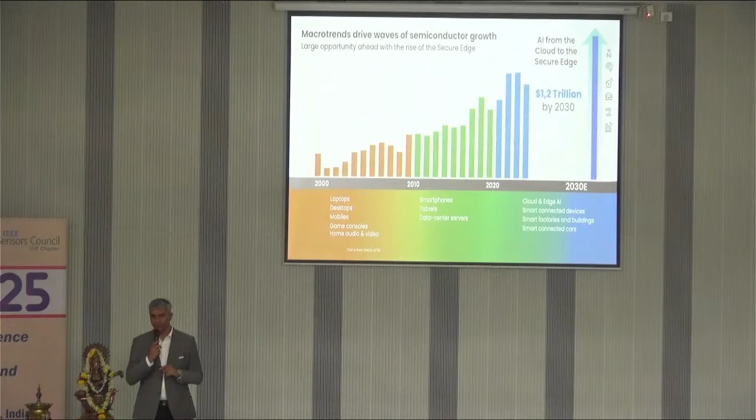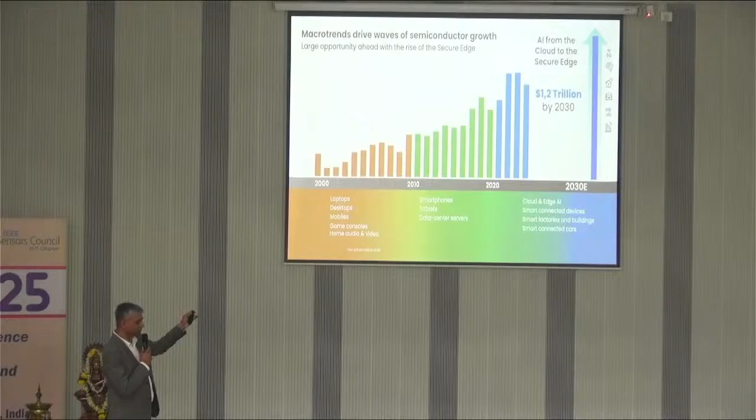I'm not going to bore you with many of the NXP slides, but I just wanted to give you an overview of the organization I work for. So this is one of the main slides for today, the macro trends driving semiconductor growth, how the semiconductor industry is shifting. In 2000s, I've put them in three brackets: 2000, then 2010, then 2020, and what we can expect in 2030, which I'll cover in the next slide.

In 2000, the major focus was on laptops, desktops, mobiles, gaming, etc. getting introduced, and they kind of pointed the whole decade. Fast forward 2010, the phones became smartphones, the television became a smart television, refrigerator became a smart refrigerator, the oven became a smart oven. So all the smartness got into devices, and then certainly a huge push on tablets and data centers.

Fast forward 2020, we call it as the era of cloud and edge. Edge with AI. Smart connected devices, smart connected buildings, homes, cars, and whatnot. I'm going to talk more about cars in the upcoming slides, but edge with AI is something where most of the world's solutions are moving.

Because first, we want to process at the edge. We don't have enough patience to fetch the data, send it to backend compute, do the compute, generate some next action and send it back to the device. We want to process everything at the edge because we want zero latency. And second thing is with the AI - once you extract some data, we want AI to be in place to find out what makes sense to us, and quickly take action based on that and move forward.

Quick example of edge AI is autonomous vehicles, where there's no driver sitting inside the car, and there is a situation on the road. The car has to identify the situation, find out what would be the next action, and implement that action before the blink of your eye. We'll be talking more about those in the upcoming slides.

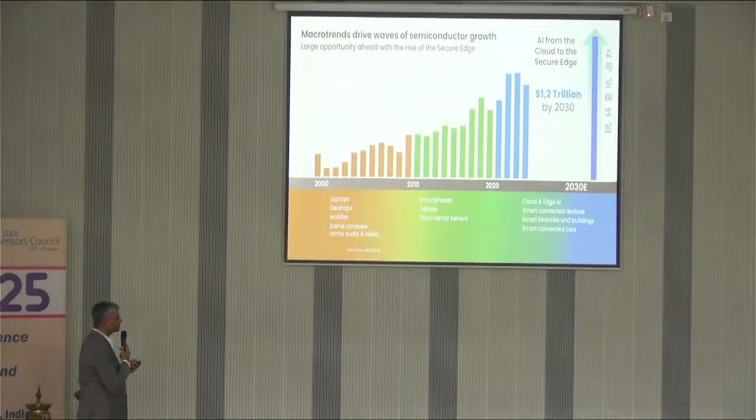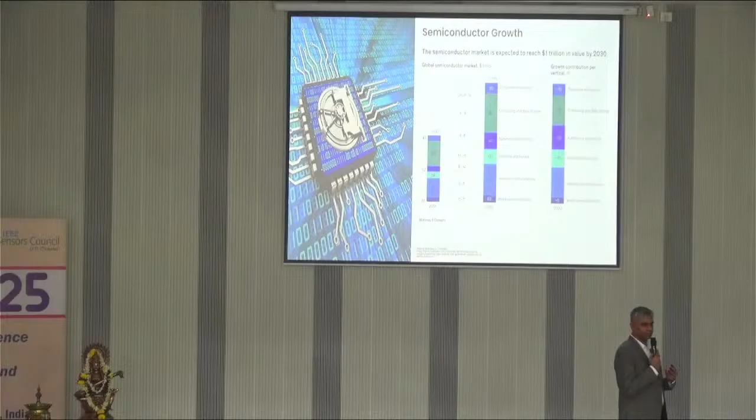The next slide has more details, but by 2030 we will have more than $1 trillion plus economy when it comes to semiconductors. One of the reports published a couple of years ago, which holds true, says that by 2030 we are going to hit a 1 trillion, 100 billion plus market. These growths in these 10 years are expected across different segments. If you see, the large part of it is coming from computing and data storage and communication, wireless communication. A huge chunk of this is coming from automotive electronics.

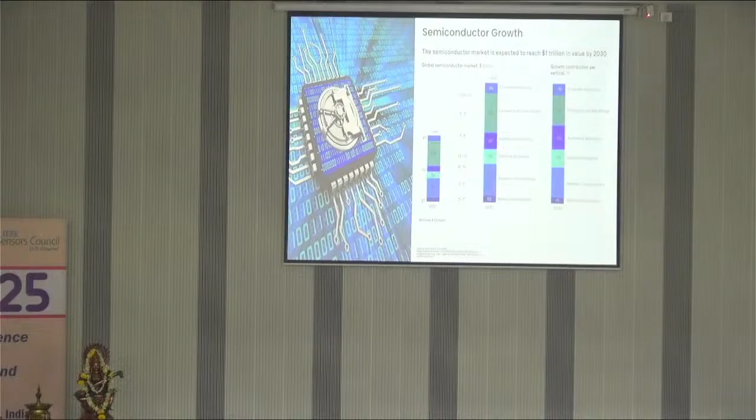That's where we have a strong hold at NXP. Certainly then there are industrial, wired communication, consumer electronics, etc. But that's where most of the focus is, and that's where most of the companies in this particular segment are investing.

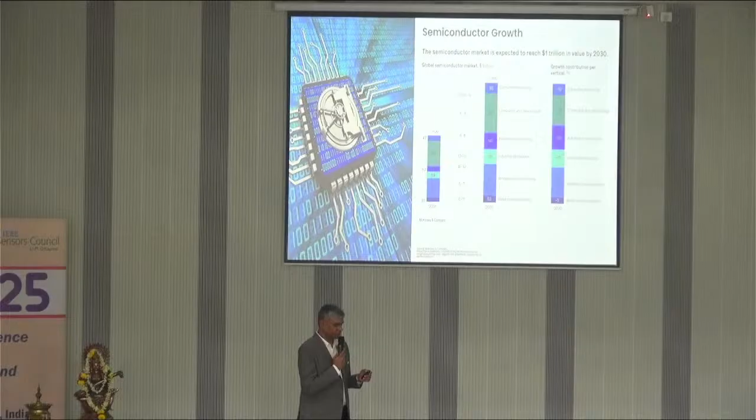The smart gadgets, especially on the healthcare side of it, are getting a lot of traction. Certainly we want them to be smarter, we want them to be as minute as possible, and we want them to live for a longer life without any recharge. Ideally, I would like to see a phone in my lifetime which I buy off the shelf and don't need to recharge for the rest of my life. That is possible - one is certainly how do we get that energy, second is how do we consume the least of the energy.

COVID has taught us how to be effective, how to do our business, how to study or do whatsoever, still being 6 feet apart. And these smart gadgets are enabling us to achieve that.

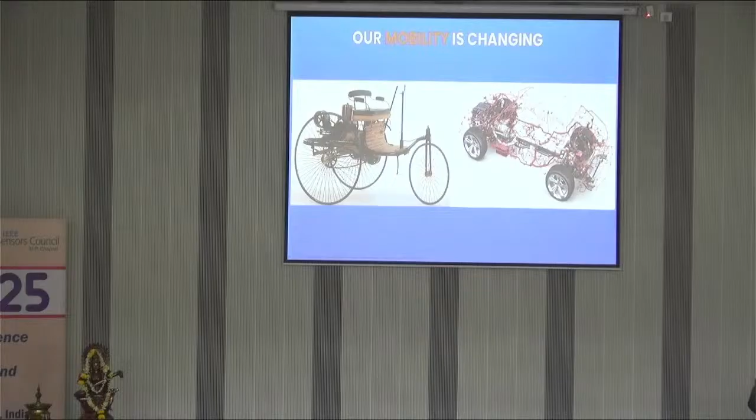I want to give this opportunity to the left audience first. Anyone in this row? 10 kilometers? You guys, come on. You're not going to get a chocolate from me for a right answer, or any penalty for a wrong one. But it goes into kilometers, not exactly a few hundred kilometers like we use in space rockets, but it is in kilometers. Any guesses the length of this whole wire harness inside a car?

I'm not going to come to you guys, you speak a lot. Any guesses here? No Google allowed. Is it in some grams or kgs? Extreme right, in kgs, how many kgs? 5, 10, 15? 10 kgs. Excellent. So it can go as high as maybe 100 kg.

So what if I make this car a smarter car? Instead of having 100 different functionalities, if I give them a big powerhouse to do all that compute, I can reduce this wire harness weight, and the less the communication time, the better the efficiency is.

Okay, let me move forward. So, shift in mobility. Okay, paper leak ho gaya kya? Okay, I wanted to ask another question here. How many semiconductors are typically there inside the car?

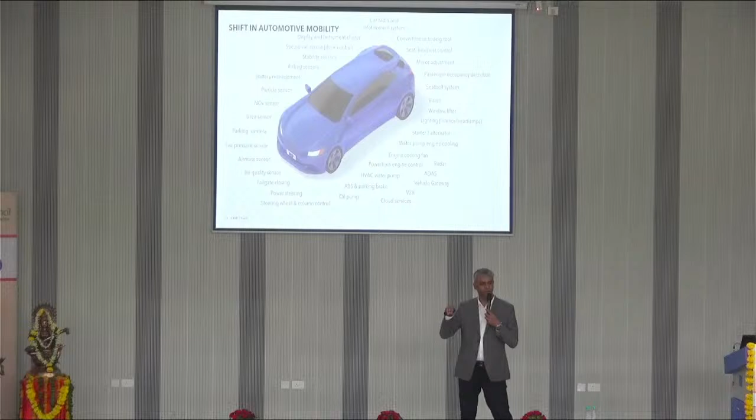Typically we prefer our location services to be on in our smart gadgets. I'm not fond of smart watches, I prefer an analog one. So if there's a smart watch which you are wearing, or a smartphone with location services on, and if there's a smart hacker who can get into your phone, they would know, okay, I'm inside Bhopal now. Even if I take the very first flight, it's going to take a couple of hours for me to get back to my home. So they have a safe haven to get into my home and have their fun.

So with every technology, certainly there's a flip side of it as well. Let me move forward on this particular topic. Automotive, accelerating the road to vision zero, and there are many kinds of vision zero we are targeting.

Let's first talk about autonomy. Autonomy is the driverless car we talk about. There's a study which says that 94% of accidents are from human error. So if we remove this human from the car, we can save 94% of lives. That's millions of humans, if I don't have human error while we are driving.

How is it possible? It's possible using ADAS. Anyone in the room who knows about ADAS? Excellent. So it's Advanced Driver Assistance System.

That means the driving would be done by autonomy instead of human. And there are different levels of autonomous vehicle. I can spend half a day talking about those levels, but I'll try to quickly summarize them in the next 2 minutes. Level 0 is our typical car, a human drives with a typical gearing system, etc.

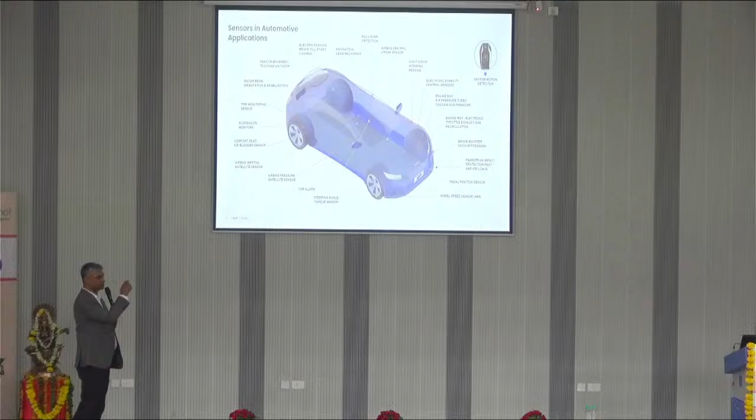Again, a good view of sensors in the automotive application. I'll probably skip this in the interest of time, but as you see, there's a hell of a lot of sensors sitting inside the car. The major technology vectors for any smart device are sense, think, connect, and act.

First, you need to sense what's going on. Then you need to process that information. Then you need to connect back and act based on the information.

A typical example you might have seen 2 months back when we had a conflict with our neighboring country. We sensed, we connected, we acted, and destroyed the object before it hit us. The same thing goes for any smart gadget.

And we have multiple solutions around it, from cloud infrastructure to enabling technologies to edge solutions. These are the different solutions NXP offers.

I'll fast forward to this, an important slide to talk about. I can spend hours and days talking about car infrastructure or architecture, but quickly, the vehicle transformation is underway from a hardware-oriented vehicle, where different functions sit in different parts of this chassis.

Functions are tied to ECUs. It has a static architecture and exponential increase in complexity. The more new systems come in, new features come in, the complexity goes high. So the future car would be software-defined vehicle, SDVs. That's where huge investment is ongoing.

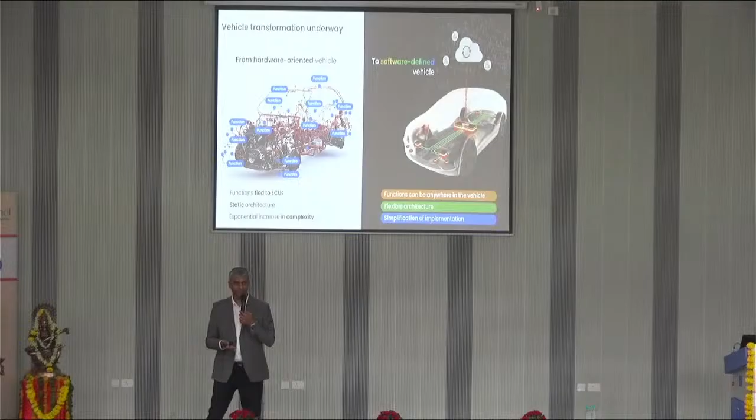So functions can be anywhere in the vehicle, flexible architecture, simplification of implementation. We want the powerhouse to be sitting inside the car, and this processing should be so strong that even if a functionality I'm not aware of today gets processed or created in the next 5 years, my processing should be strong enough to get that patch loaded inside the vehicle and start enabling those features.

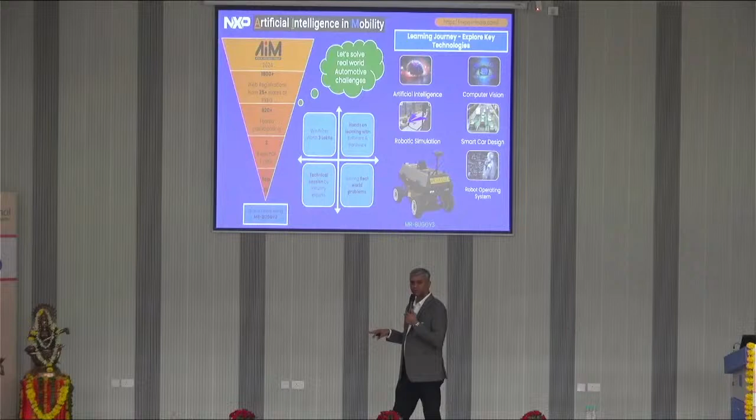Another good thing I want to talk about is Artificial Intelligence in Mobility, AIM. This is again an annual event of ours, and we closed the registration on 23rd of June for the 2025 session. I really feel proud that we got close to 5,600 registrations. The good part of the story this year is that we got registrations from every single state of India. Typically in the past we haven't done a good job reaching the northeastern states of India, but this year we are glad we have participation from different states.

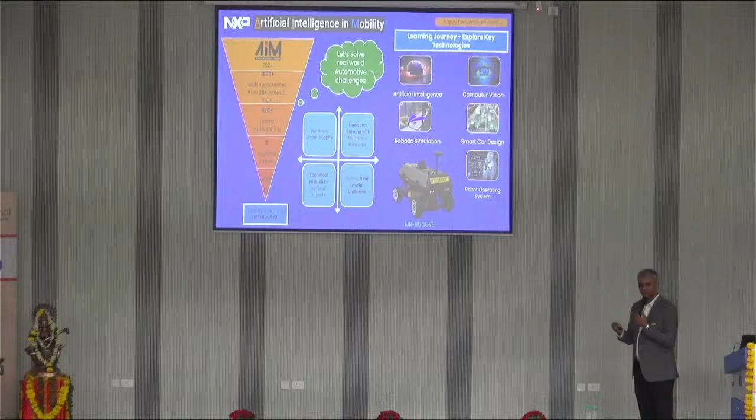So this is an annual challenge we do. The stats you see on the slide are from last year, and since we closed this registration and sent out mails just yesterday, these numbers are yet to be updated. We did 3 regional finales last year, one each in Hyderabad, Bengaluru and Noida. We are going to do the same this year.

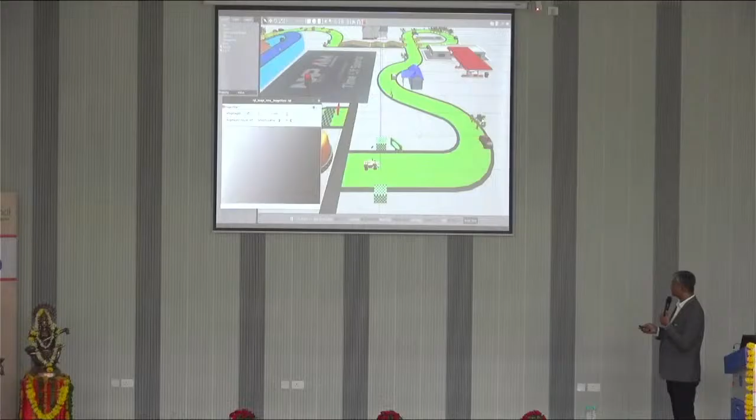In the regional finale, what happens is, let me show the next slide - this is what we do. The students design on an artificial track, and we select them for the grand finale from these three different regional finales. To these regional finale winners, we give them an MR-Buggy kit.

How do I get to the previous slide? So we give them this kit, which is worth $5,500, and then we train them again. Before this regional finale event, we are going to start the training from 30th of June. We train them, and they then play around with this hardware. We do a grand finale at our NXP Noida office, where these physical buggies compete, and there are 3 lakh plus worth of prizes to be won.

The other initiative is the Women in Tech program, which at NXP we run as an annual event, and on 4th of July all these women will be visiting our campus for the 4th batch. There is a selection process - you need to apply, then there is a written test, some interviews, and if you make it, you get trained for the next 1 year by our training partners, and you get a 50K scholarship, conditions apply, some taxation etc. But you need not pay for those trainings, that's all taken care of by us. That's again a good initiative. Please pass it on to your women friends in the second year of engineering.

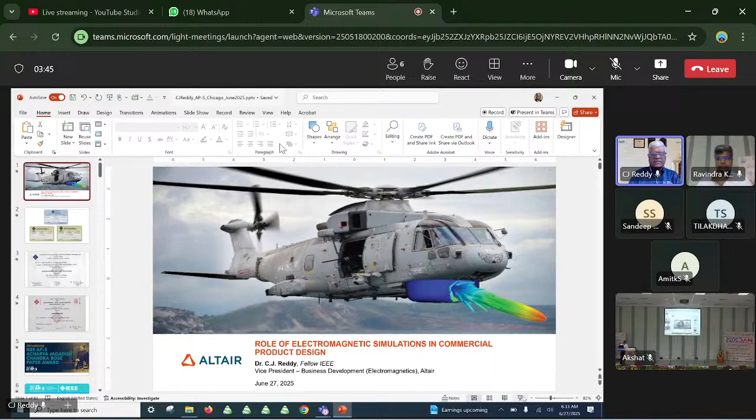I've been speaking, I guess, for a few years at this conference, and thank you very much again for inviting me. So today's talk, I'm going to focus on the role of electromagnetic simulations in commercial product design. As already mentioned, I am the VP of Business Development for Electromagnetics at Altair. Before we start my talk, you probably know that I'm currently the President-elect of IEEE APS, Antennas and Propagation Society, which played a critical role in guiding my career and also helped me professionally and personally with networking and other aspects.

So for students in the audience, I advise that some of you, if you are interested, first become IEEE members and then become Antennas and Propagation Society members. I want to share from my own history. I was a student member back when I was in college at NIT Warangal, and then afterwards at IIT Kharagpur, I continued my student membership. The reason I was attracted to IEEE back then was because it provided, I would say, courses that are beyond what is taught in the class. That helped me a lot.

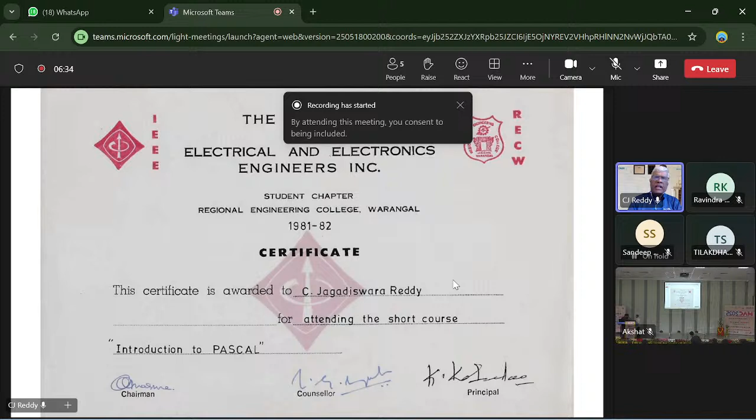Having come from India, I always thought Acharya Jagdish Chandra Bose contributed to millimeter wave communications back in the 1800s, and recognition came a bit slowly. So this year I contributed to this award to say APS should introduce this, and now there is an award by APS, Antennas and Propagation Society, in the name of Acharya Jagdish Chandra Bose for the best paper in Antennas and Wireless Propagation Letters, for a young professional who graduated within 15 years. This will be awarded for the first time next year, but there's still time. Some of you may want to write papers to AWPL — you may have a chance to win the award in the name of Jagdish Chandra Bose.

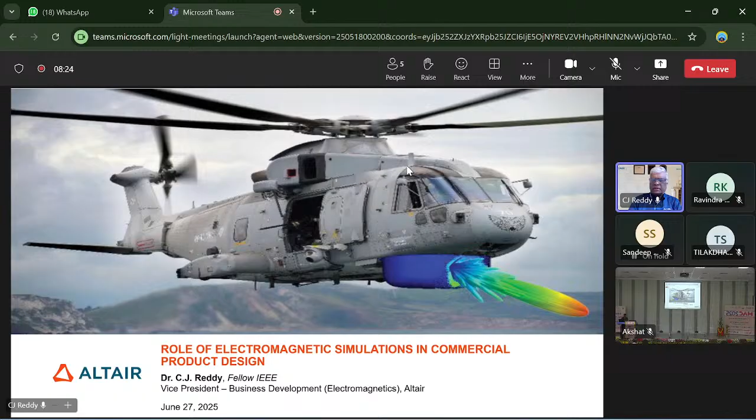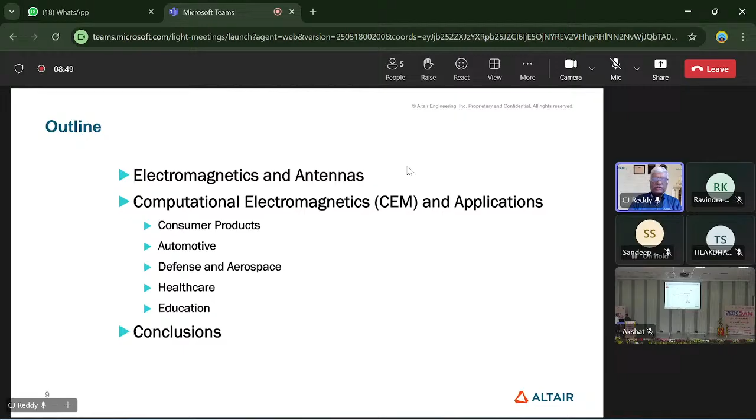That's the role of electromagnetic simulations in commercial product design. I mentioned I work for Altair, but let me give the outline here. We'll go over electromagnetics and antennas as an introduction, then talk about computational electromagnetics and how it helps in various industries — consumer products, automotive, defense, aerospace, healthcare, and education — and conclude my talk.

As I mentioned, I work for Altair, but Altair has been acquired by Siemens — probably you've all heard of Siemens. So now we are part of Siemens, and we haven't yet become part of this division, but eventually we'll become part of the Siemens Digital Industries Software division. That's the transition happening in my career currently.

Coming to electromagnetics and antennas — most of you, if you're studying electromagnetics, are not new to Maxwell's equations. Any antenna simulations we do, whether with commercial tools or otherwise, should start with Maxwell's equations, the four of them stated here. These are called the second great unification in physics, after the first one by Isaac Newton for his laws of gravity.

Taking advantage of Maxwell's formulations, Marconi started the transmission of radio waves from England to Canada back in 1901 with a 500-foot antenna. The reason he used a 500-foot antenna was that at lower frequencies, in megahertz or kilohertz, like our AM/FM radio, you require a big antenna to transmit.

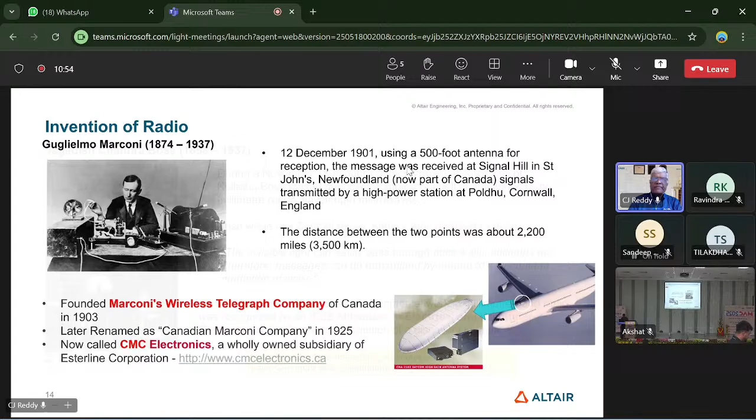At the same time, in the 1800s, we already talked about Acharya Jagdish Chandra Bose. He was doing experiments not at lower frequencies, but at millimeter waves. You may remember millimeter waves are now hot again with 6G being the buzzword nowadays — we've seen 5G, now we've come to 6G, where millimeter waves are key for communications.

But back in 1894, Jagdish Chandra Bose already demonstrated that you can generate millimeter waves through igniting gunpowder and ring a bell at a distance. He then wrote in a Bengali essay called Adrisya Alok, 'the invisible light can easily pass through brick walls and buildings, therefore messages can be transmitted by means of it without the mediation of wires' — which we are living that dream right now, that we can communicate with no wires.

We have wireless communications everywhere. Though a bit late, in 2012 IEEE recognized Bose's experimental work on millimeter radio as an IEEE milestone in electrical and computer engineering.

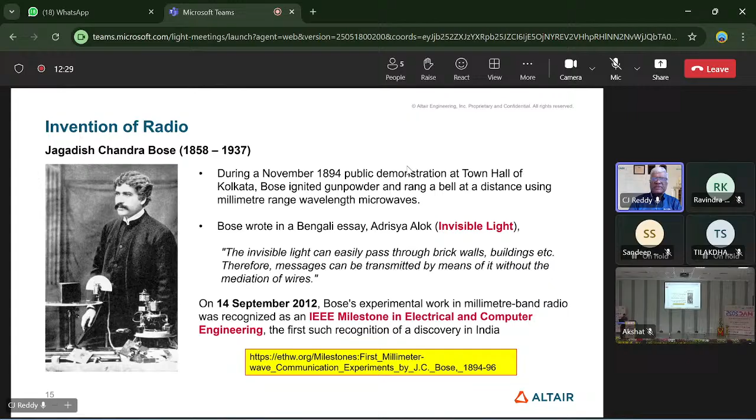Probably, if you go to Calcutta, there is a trust by the J.C. Bose Trust, and they have preserved his house and all his inventions. Not just this one — he worked on various other sciences as well. When you go to Calcutta sometime, please visit his museum by the J.C. Bose Trust there.

From those humble beginnings, antennas today, as you already know, are on cell phones, tablets, and our cars are becoming more and more connected - it's almost like an electronic device. It still has to get you from point A to point B, but more importantly it has to communicate continuously with connectivity. 5G was a vision 10 years ago, and now it's slowly becoming a reality. Smart homes are now a reality too, and of course the Internet of Things - everything is connected to everything.

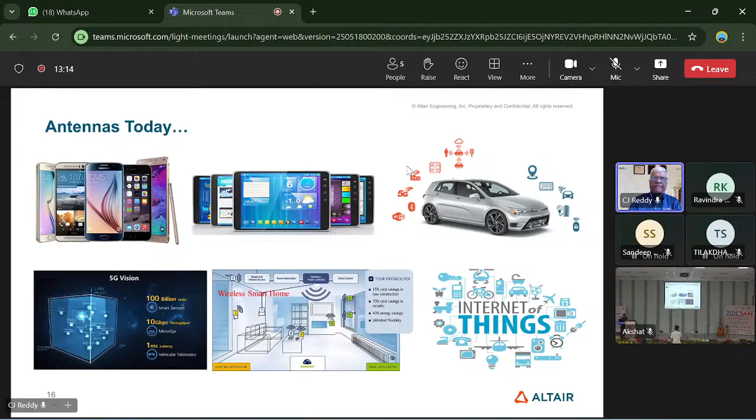Whichever industry you go to - aerospace, automotive, defense, communications, consumer energy - no matter where, you find antennas and electromagnetics there. That also brings the question of education: students like yourself and faculty should be teaching and learning electromagnetics, because there are a lot of job opportunities in every industry. If you know Maxwell's equations, you know how to design antennas nowadays.

Of course, nowadays no one is solving Maxwell's equations on paper to get the solutions you need - this is where computational electromagnetics comes into the picture. So what is computational electromagnetics? On the left-hand side you have realistic objects - cars, ships, cell phones, anything - and then you solve Maxwell's equations for them.

You get currents and fields like what I'm showing on the right-hand side. To do this on paper, one can solve partial differential equations to get a solution. But unfortunately, to solve the partial differential equations, you have to know the boundary conditions - what happens when electromagnetic energy hits a surface. Will it reflect? Will it transmit, and how much? What happens to the electric field, what happens to the magnetic field?

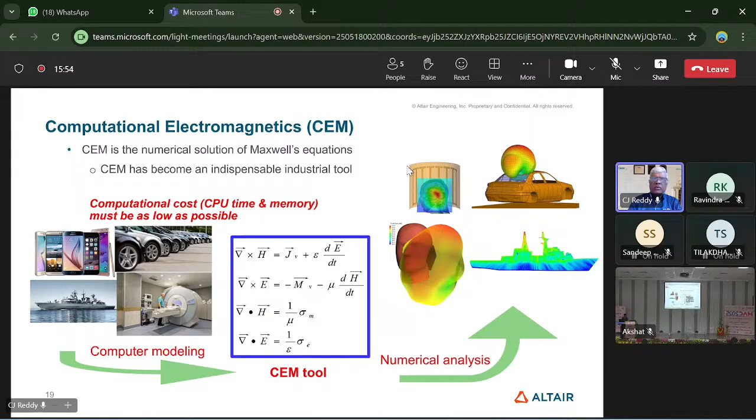How do they do that without having to know the geometry equation of these shapes? They split the geometry into small parts of known shapes, solve Maxwell's equations at those shapes, and then combine them. Let's see what that means - take a realistic object like an aircraft, with an antenna on top of it.

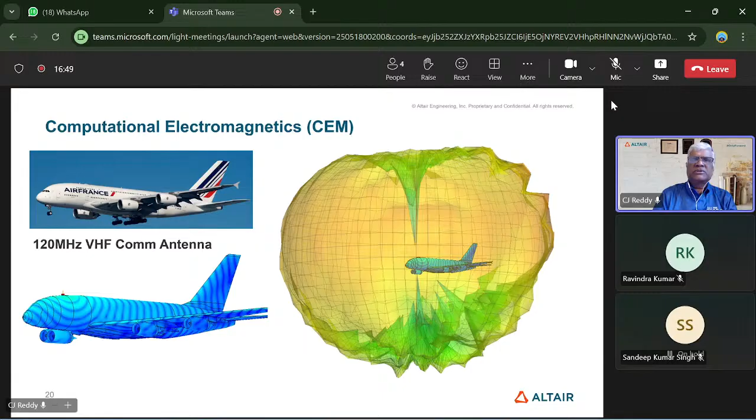How do we solve this in a commercial tool, or any computational electromagnetics software? First you build the CAD model of the aircraft and place an antenna on top of it, and you split that into small parts like these triangles you see here. These are known shapes, so Maxwell's equations can be solved at each triangle. Once you solve for each of them, you add them up to find the currents on the surface, and from the currents you can find the radiation pattern, as I'm showing here. This becomes easier than solving Maxwell's equations for the whole geometry at once.

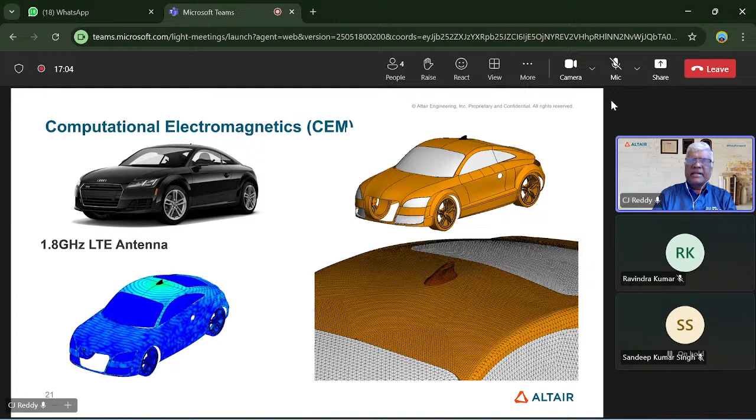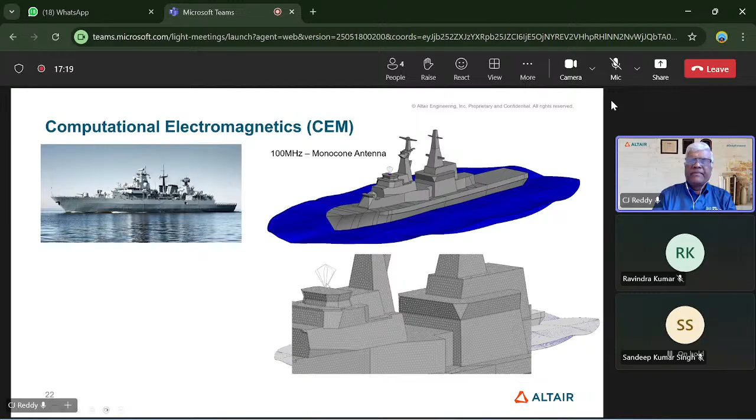For example, take a car - you do the same thing: make a CAD model, discretize or mesh it with triangles, then find the currents and get the radiation pattern. You can do this for any object. Here is a little antenna, a bicone or monocone antenna, and then you can solve for the currents and get the radiation pattern.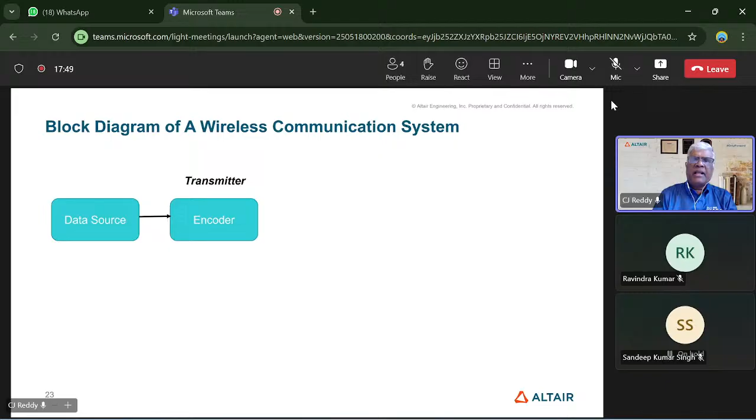Typically what happens in a wireless communication system is you start with a transmitter with a data source. This could be, for example, us speaking here - I'm speaking to my speaker, and the voice is the data source. That data source is converted, encoded for privacy, and then modulated. Modulation means you take the low frequency electrical signal and add it to a high frequency wave, because that way you can have an antenna small enough to transmit it.

Otherwise, you have to go by the wavelength divided by 2, and at kilohertz, it could require a large antenna type that you cannot accommodate in your cell phones and other devices. So normally they modulate it at 2.4 gigahertz, for example, or 5.2 gigahertz, so you can have a smaller transmitting antenna.

Then you characterize the channel, and then you go to the receiving antenna and demodulate it. That means you bring down the frequency, decode it, and then you hear, if it's voice or the data you're sending. So what is the channel?

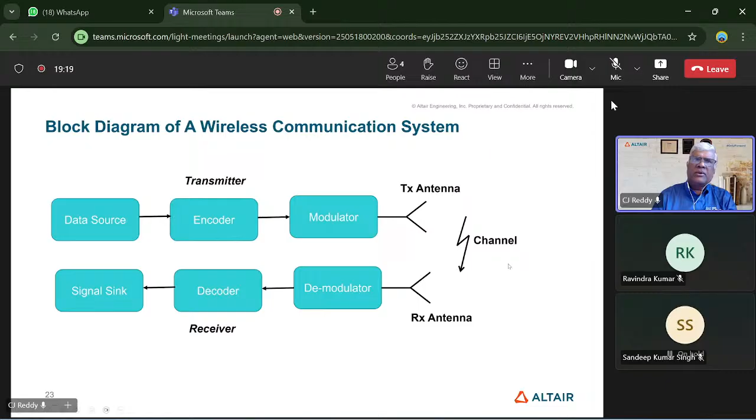The channel is something that comes between the transmitting antenna and receiving antenna. For example, you're talking on the cell phone, and the cell phone signal, your data source, that is your voice, is encoded, modulated, and transmitted to the transmitting antenna, travels all the way through your walls around you, but also the vegetation and others, till it reaches the base station. So that process is normally referred to as the channel, that is whatever comes between your transmitting antenna and receiving antenna. So that's also an important aspect of the communication system.

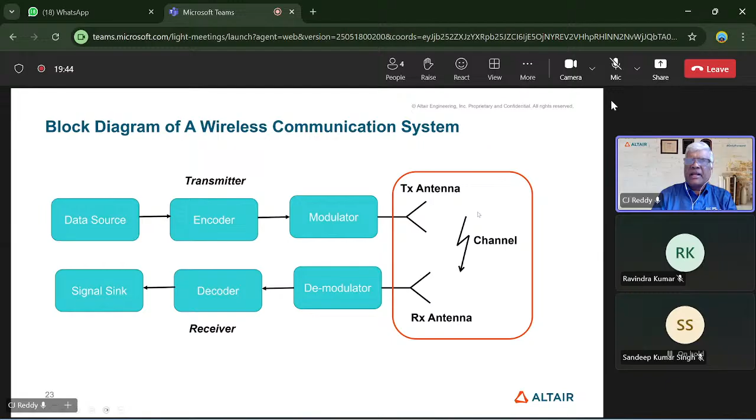So what we're dealing with here is this portion. This is the antenna portion, transmitting antenna, receiving antenna, and this is a channel. This is characterized by propagation models. Typically for our solutions, antennas here and the propagation here. And this is also covered in our Altair antenna simulation solutions. Altair FEKO, this is used for antenna designs and antenna install performance, anything that relates to antennas and their performance on platforms. And then WinProp, that will take care of the channel properties or channel characterization through wave propagation, radio network planning.

So this is the antenna side on the top, and then the bottom is the propagation side. Both play a critical role in wireless communications. So how do they work together?

You start with an antenna design. This is the blade antenna on an aircraft, and you make a CAD model. You simulate the radiation pattern, which is like a monopole pattern. This is the omnidirectional pattern that you see, very nice one with no ripples, and it's a radiation pattern.

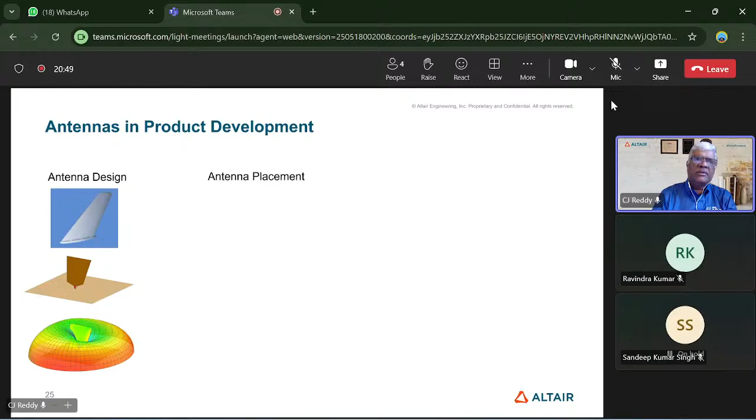Can we optimize it to get to this ideal one? Maybe not, because of the shape of the platform we have, it's almost impossible to get to what we have. We can maybe try to minimize it. But even then, a simulation can help you understand what a system designer should do. Maybe you should use more transmitting power if you want to communicate through these nulls, or maybe the system should have more receiver sensitivity, so it can receive signals through these nulls. So this can help them before they make the thing and install it on the aircraft.

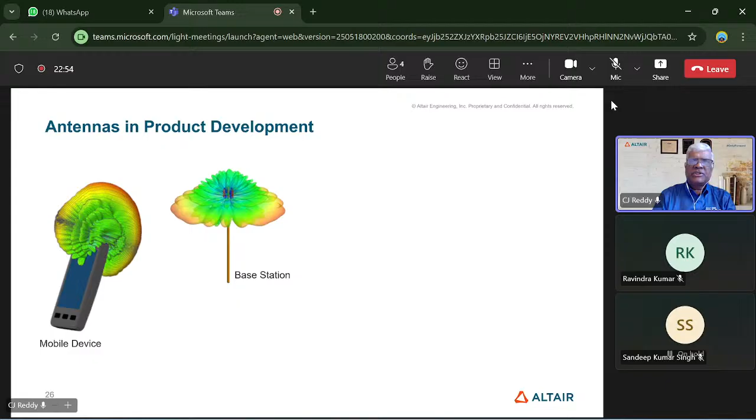Same thing for a cell phone, for example. You can simulate the cell phone, simulate the base station, and then put that into a larger scenario like a city and see how the connectivity works. This is what we call channel characterization. Your base station is here, and your cell phone is somewhere here. What kind of signal you can receive, and what goes on in between those two things.

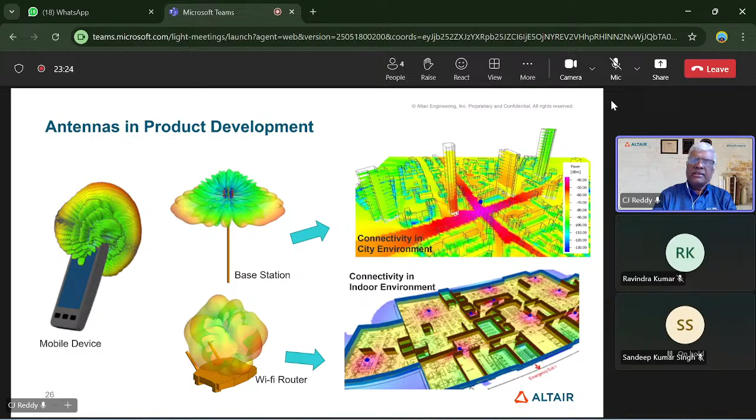And you can do the same thing indoors as well with a Wi-Fi router, and of course you can do access point optimization within buildings and so on and so forth.

That's the broad picture of what computational electromagnetics can do. Now let's see what people are doing. These are some customer examples we picked up from various sources that I want to show, starting with consumer products.

What's the most used consumer product nowadays is a cell phone. This is an LTE smartphone, which we published in a Microwave Journal back in 2012 or so. One of the things in LTE is MIMO, multiple input multiple output. That means you have multiple antennas on the cell phone, but they all act independently, meaning though they're close enough, they don't couple to each other. That's a key thing you need to look at when you design antennas for cell phones - when you design for multiple antennas, they should look like they're independently operating.

At the same time, there are concerns about the safety of using the cell phone. That safety factor is measured by what is called SAR, specific absorption rate. Every country has a standard, and the US has a standard for measuring SAR in a 1 gram cube volume. So you can do those simulations as well, to make sure the antenna radiation is not affecting human tissues and complies with the standards of the particular country where the cell phone is used.

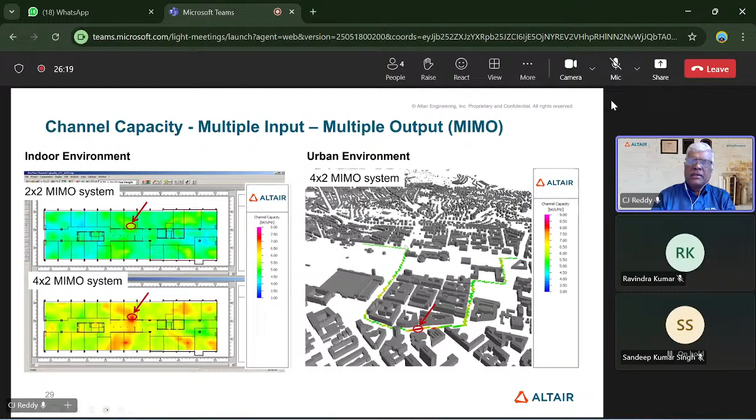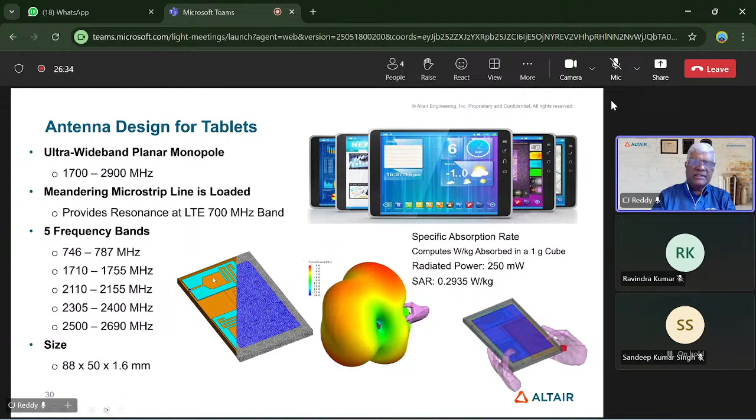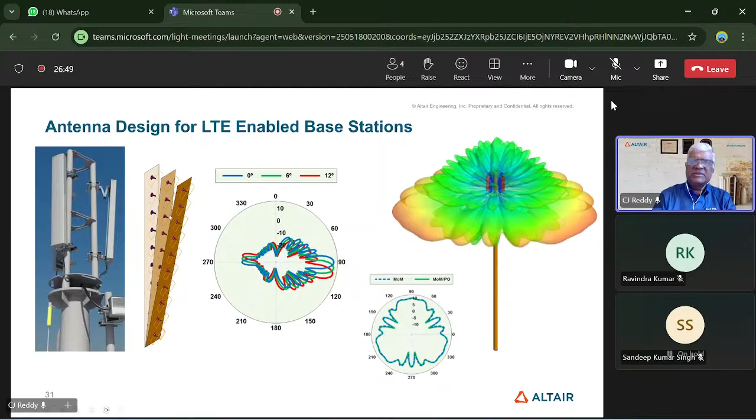Similarly, one can do the same thing with tablets, which are a little bit bigger, so you can use broadband antennas, but again with multiple antennas - one here, and another in a different direction there. You can also simulate base stations, and those antennas actually move up and down based on traffic, which can also be simulated within the software to see what happens.

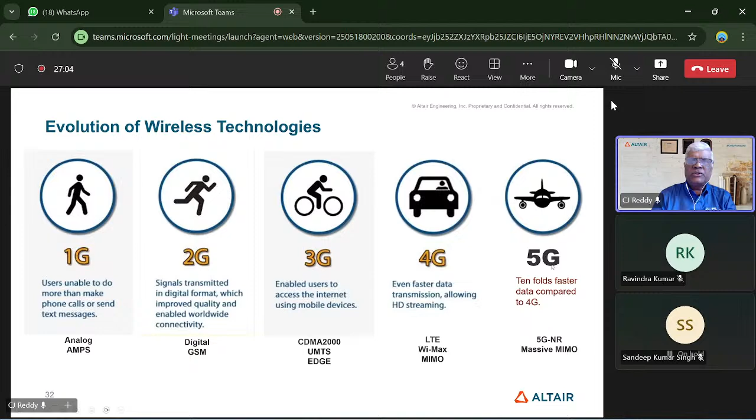Now we are all talking about 5G, with evolution going from 1G to 2G to 3G, 4G, and 5G. Through this evolution, why do we need 5G? This was back in 2020 when discussions were going on. This is because data consumption from the beginning of the internet in the mid-80s to now has grown tremendously and kept growing continuously. Back in 2020, they predicted 4.3 zettabytes of data consumption. A zettabyte means 10 to the power 21, which shows how much we're consuming data every day - I don't have to mention that, because we use it every day in our lives.

So why is 5G better than 4G, and able to capture more data than 4G, or 2G and 3G, can do with respect to LTE? Back in 1G, 2G, 3G, and 4G, there's only one antenna with an omni pattern, meaning it can receive signal very well in one direction, but if you flip the phone, it may not receive the signal properly in that direction. To avoid that, they started with LTE what is called MIMO, multiple input multiple output - you have one antenna like this, and a second antenna like this, so whichever direction the signal comes, you should be able to receive it.

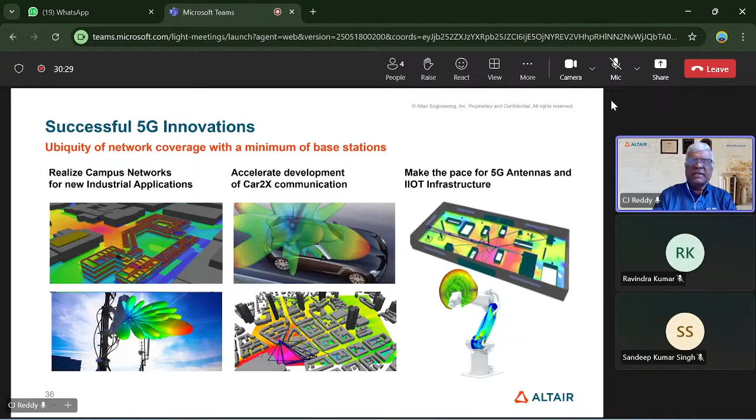Same thing happens on the base station side, a focused beam that's actually pointing to the device. So this means that both the base station and the mobile device has to be scanning all the way, looking for the signals and lock onto the signals for better communications. That's how they were able to increase the data rates. So of course, with those applications, with increasing data rates, multiple applications can be done.

So that's a little bit about consumer electronics. Now in the automotive sector, automotive, as I already mentioned, is becoming as much an electronic device as any smartphone and those kind of things. But interestingly, in any car you drive, you have devices that use kilohertz range all the way to 77 gigahertz range. The lower end, the key fob that you use, actually uses kilohertz frequency for operation. And the high end at 77 gigahertz, you have the automotive radars that use that frequency.

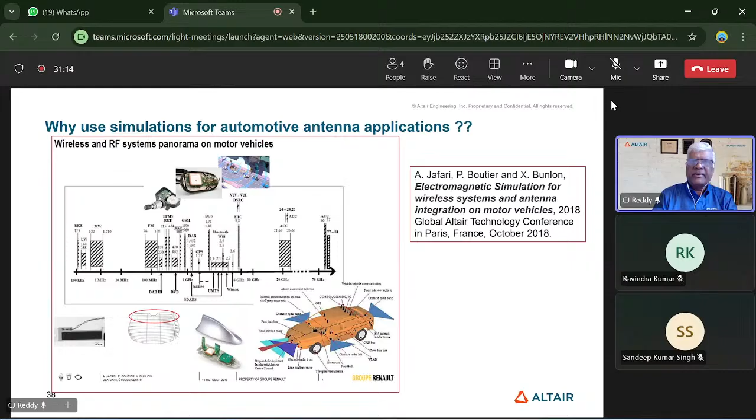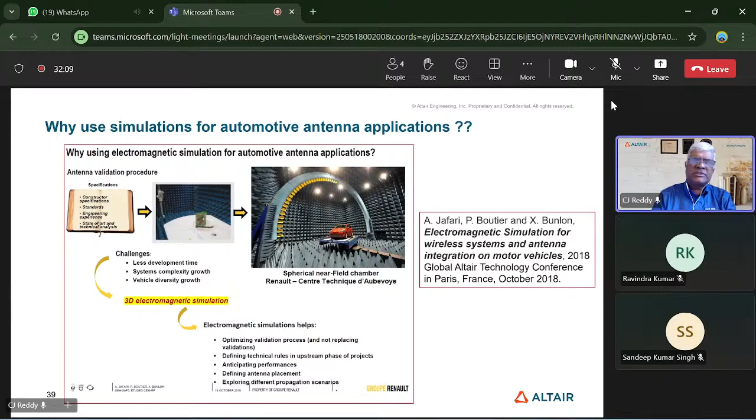Taking the car itself into the chamber and all those things, it's also time consuming. So if you find some problem, then you have to repeat the whole thing again, and that iteration can take a while and be very expensive and time consuming. This is where simulations can help the industry find out the best way to design and the best way to place these antennas into the car so that they can operate properly as needed.

For example, they want to put a receiver for the key fob inside the car. Instead of trying to do that by hardware, they could simulate the car, put the receiver somewhere, and simulate the key fob with the human body to see how the signal can communicate to the receiver, optimizing the receiver location. When they went for testing, they found that the simulations and measurements agreed quite well. That means they can use simulations to make sure the receiver is placed in the proper location and make it faster to market.

Also, nowadays most cars, if not all cars, have what is called TPMS, tire pressure monitoring systems, that can tell you when the tire pressure is low in your car. But the problem is you have a tire pressure sensor that has to communicate wirelessly to the dashboard, where your receiver for the TPMS system is sitting. And what that means is that you have to make sure that every tire, all 4 tires, are able to communicate properly to the dashboard.

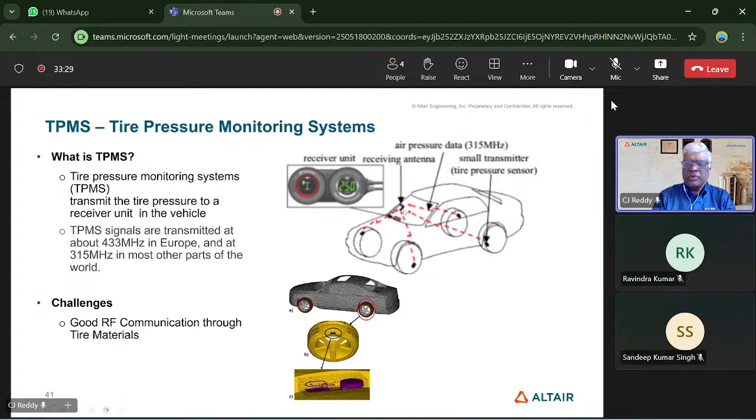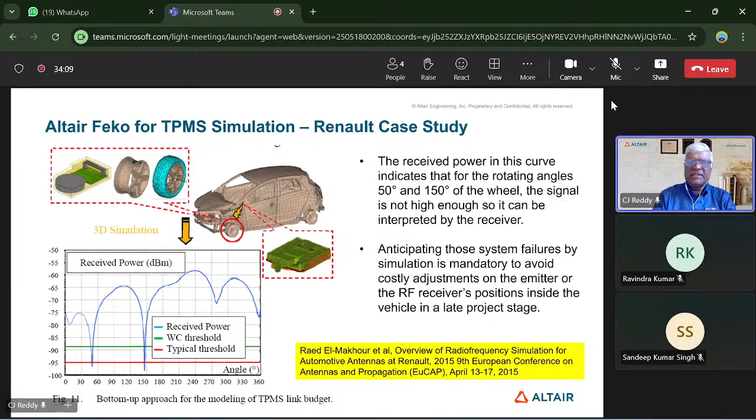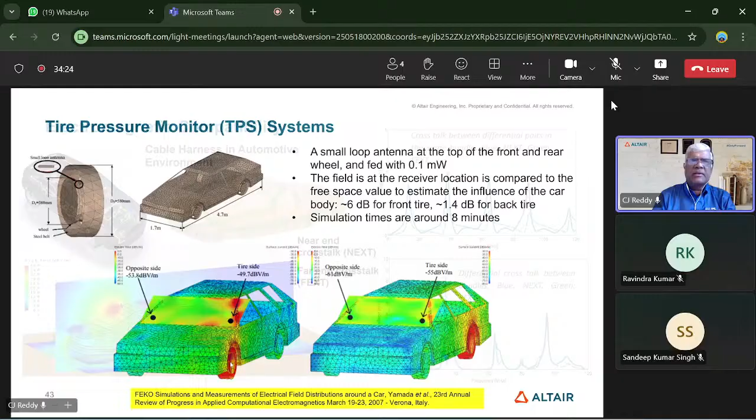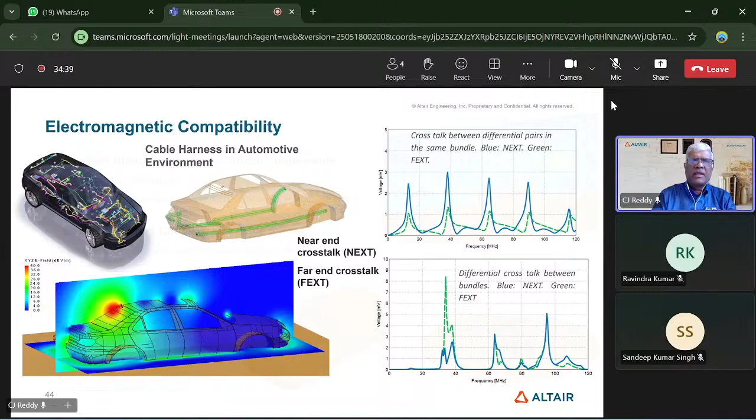Similar experiment here with the simulations, to see how much power is received at the receiver from the tire pressure monitor system. Also, electromagnetic compatibility is becoming a critical issue, even more so with electric vehicles, with high voltage lines running along with the signal lines in the automotive industry. This is some of the simulations they do to emulate their testing. For example, they take the car into an EMC chamber and use a broadband antenna to subject the car to various power of electromagnetics, and then see if anything fails within the car.

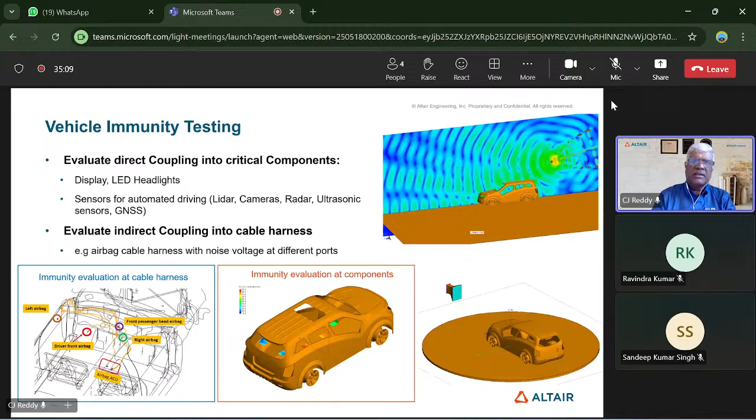That can be simulated as well, so that you don't learn after the measurement rather than during the design process of the car. Another aspect happening in the automotive industry is called virtual drive test.

Most of the time in the past, when simulations were not that prominent, if you put a cell phone antenna or GPS antenna on your car, the car manufacturer would drive through various roads and find out whether the signal is being received or not.

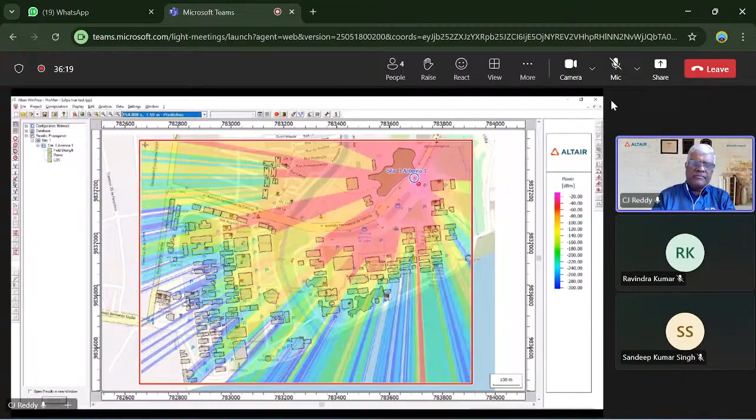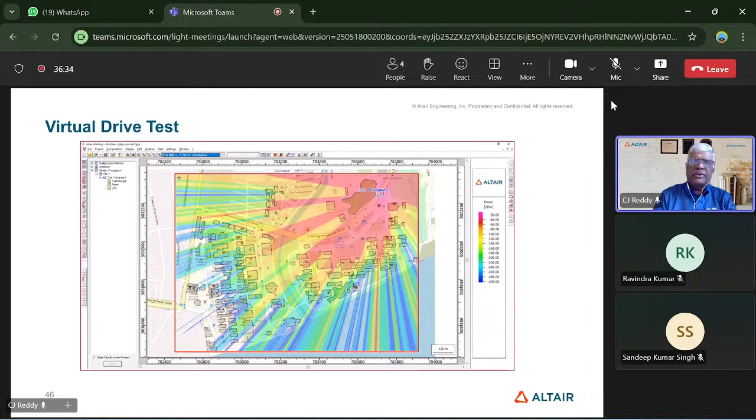Let me play this short video. You can see the car moving all the way to the other side, and you can see the shadows move. This is an example of doing simulations with a virtual drive test to find out whether your antenna location on the car, or your antenna design, is working properly before actually designing the antenna, putting it on the car, and physically driving it, which could be very expensive and time consuming.

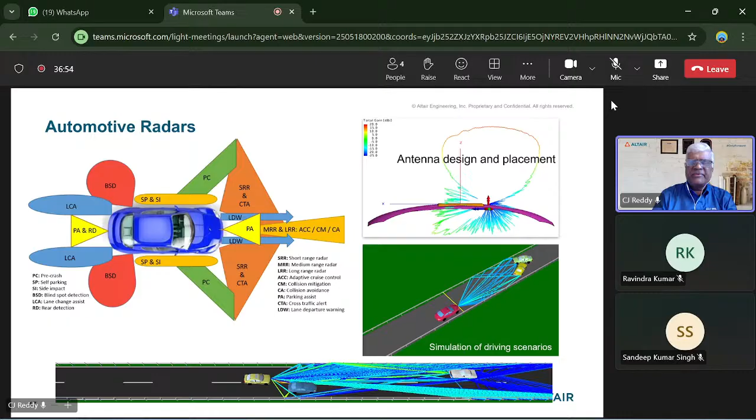Automotive radars are also becoming popular nowadays, or almost every car may have automotive radar to make sure we are safe. That can also be simulated in WinProp, the software that we have. You can actually simulate multiple cars and then see the results.

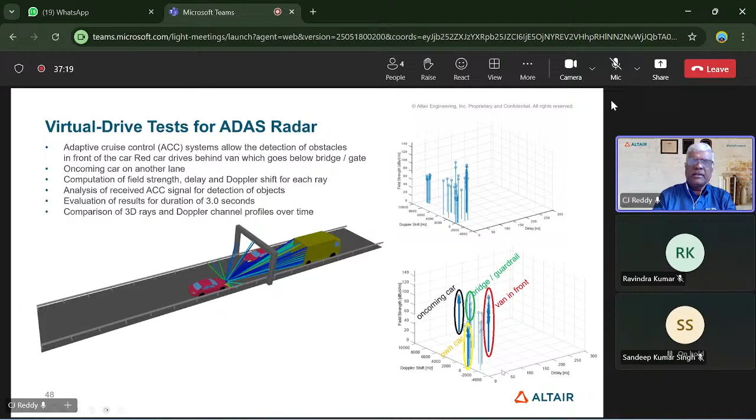These are actual calculations done with ray tracing, showing how the signals are being reflected off of the various vehicles, giving you the Doppler shift so you can distinguish between vehicles coming in the opposite direction or the same direction. Similarly, here's another scenario with a bridge, for example.

Bridges were a problem in the beginning of automotive radars, when they thought the bridge was something big coming in front of you. But through signal processing, they can eliminate that, saying there's no Doppler shift there. You should be able to relate to the Doppler shift and eliminate that from your design.

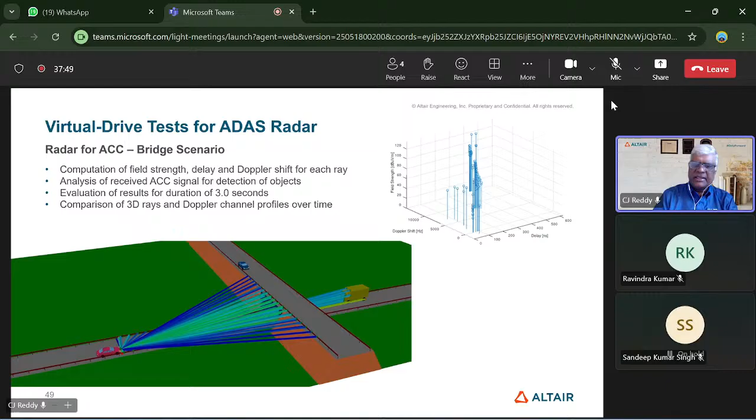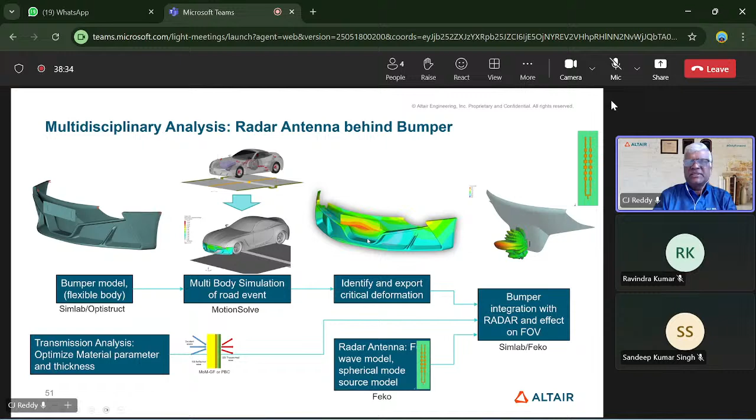Going further, you can also do multi-physics analysis - what happens when you're going on a bumpy road and your car bumper is moving, and the radar is also moving, and what kind of sensitivity it will have in detecting objects because of this movement.

At the same time, we talked about safety. There are various safety aspects you need to consider - hazards of electromagnetic radiation to personnel, that is human bodies, but also ordnance. Let's say if you have a Navy ship with powerful radars, that high power electromagnetic energy should not be igniting the ordnance, the bombs and those kinds of things, which can be very dangerous. Same thing with the fuel.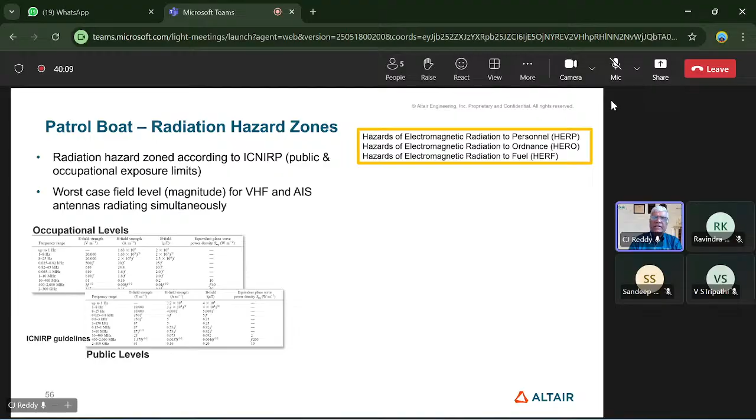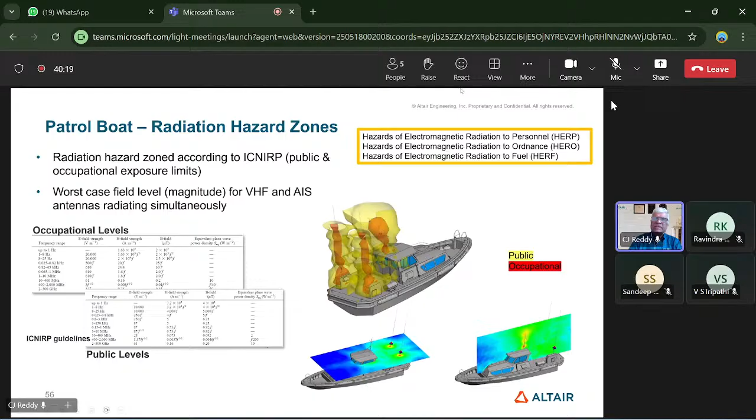That can be done using these ICNIRP levels, and we can actually plot those things here. Where you see the red one, that's the occupational hazard zone, and the yellow one is the public hazard zone that can be plotted.

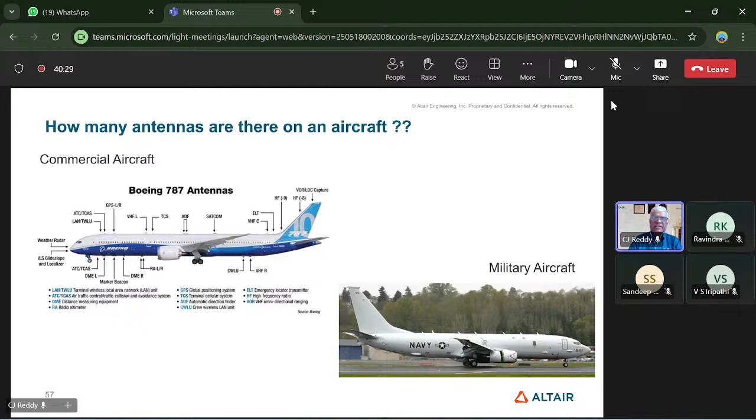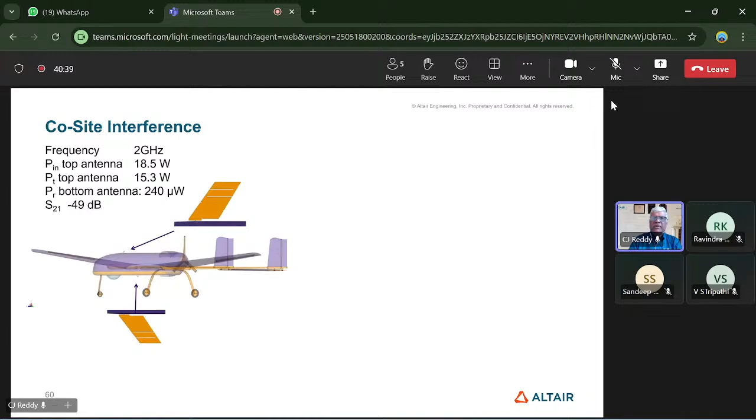Aircraft also have multiple antennas, as shown here, both in commercial and military applications. These can also be simulated, as we've seen before. And also in drones, which are very popular nowadays, their antenna performance and coupling can be simulated, and also radomes.

Radome is a word used when an antenna is covered with a kind of cover, enclosed with a cover to protect from environmental effects like rain and those kinds of things. The radome has to be strong enough to protect.

For example, in the nose cone of any aircraft, you see a radome there. When you fly next time, you may want to see that there's something different about the nose cone of the aircraft. The rest of the aircraft may be metal, but the nose cone will not be metal. It's a different type of material that can transmit electromagnetic waves through the nose cone, but at the same time it should be able to withstand wind loading and other kinds of things. So we could simulate those things as well when it is scanning for the weather.

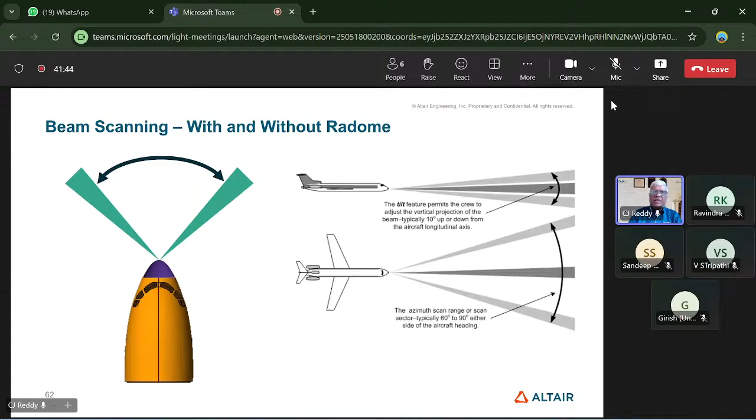Of course, lightning effects can also be simulated. There was a NASA project done sometime back called SansEC, a lightning protector for composite aircraft. We can also detect the damage done by lightning through scanning this structure.

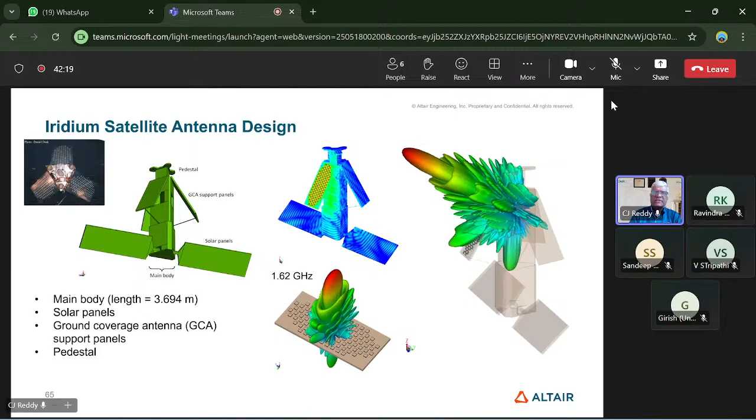Of course, simulations are also used in satellite communications, as you could see here with this satellite and its radiation patterns. So the new thing that's coming in nowadays is called digital twin.

I picked this picture from a report from the National Academies in the US. This portion explains what a digital twin means. You have a virtual representation, where we're doing the simulations, and the physical counterpart.

Let's say you take a car, for example. We are able to simulate the car with a CAD model and those kinds of things, and that's the virtual representation. But then when the car actually exists, that's the physical counterpart. So the virtual representation can guide how the physical part should behave, and then the physical part can also provide feedback to the virtual side.

They give an example of a cancer patient here. This is the digital or virtual part where you can simulate what happens with drug use, for example, to cure cancer. If it's showing positive effects, you can administer it on the real patient, and the patient may have some side effects that can be fed back into the virtual one to refine it. So you can use this virtual representation to better your treatment of the patient.

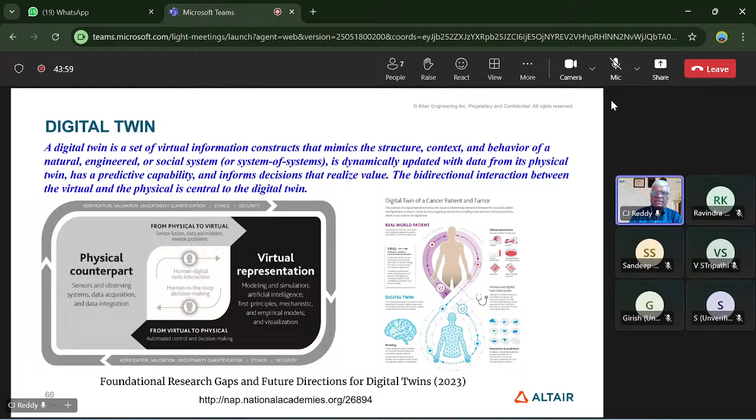This has actually been applied in electromagnetics as well. Recently there was a paper published from NASA Jet Propulsion Laboratory by Dr. Nacer Chahat and his group. They were working on this NASA rover back in 2020, where this rover, probably you've heard about it, went to Mars along with the Mars helicopter.

Of course, this was not a very... science mission, I guess they call it, because the rover, when it goes to Mars, collects soil samples and sends that information back to Earth. Whereas the helicopter was just sent there to see if it could fly in the Mars atmosphere, just as an experiment. There's no collection of data or anything like that.

But at the same time, they made sure that the connectivity between the rover and the helicopter could be maintained. Whenever the helicopter receives a signal from the rover, it measures the signal, tells how much signal is received, and sends that information back to Earth so they know what they're computing is correct or not.

Initially, they were using a method called Bullington's model, which is a free space line of sight communication. That means both the rover and the helicopter should see each other for good communication, which worked well for some time.

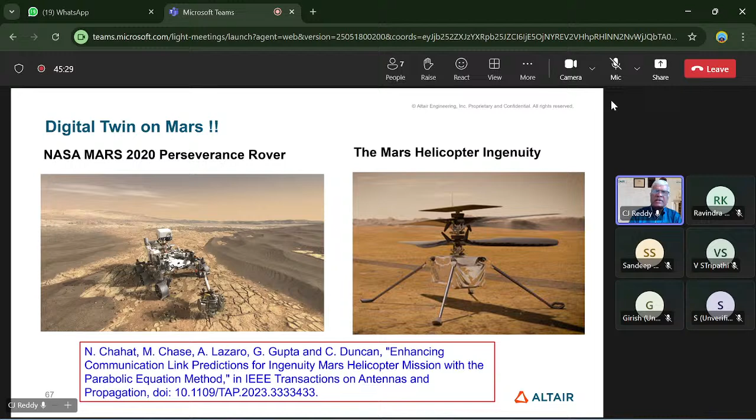But then what happened was, once the helicopter went out of line of sight, moving away from the rover where the rover cannot physically see the helicopter, the signal they thought the helicopter should be receiving was much less than what they predicted. This means if it goes beyond a certain limit, they probably can't communicate back to the helicopter, and you can't get the helicopter back because you can't give a command to come back.

So this is where they realized they needed a digital twin. They constructed the rover as a CAD model in FEKO, and also the helicopter, and used this model as a virtual representation where they could compute the signal received beyond line of sight using WinProp. They used those path calculations to guide the helicopter to fly wherever there's a good signal, so they could get the helicopter back.

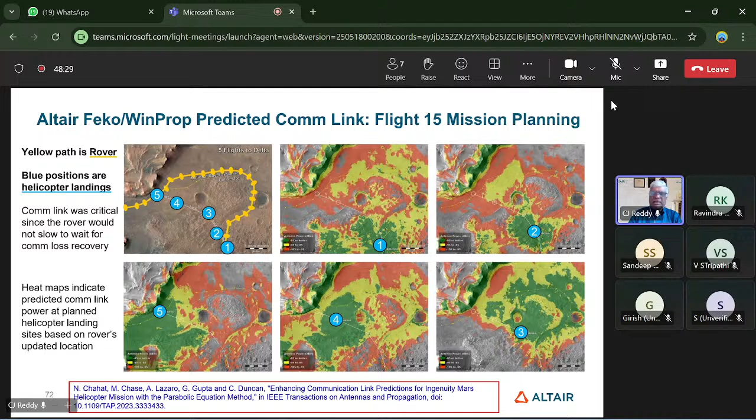The helicopter, whenever it landed somewhere, took some pictures. This actually originally started as 5 flights, and of course they could do 72 flights because of this new capability of having a digital twin with simulations on Earth.

Simulations can also be used in healthcare. For example, MRI cages can be simulated and designed along with human bodies. One of the problems with MRIs is that if someone has

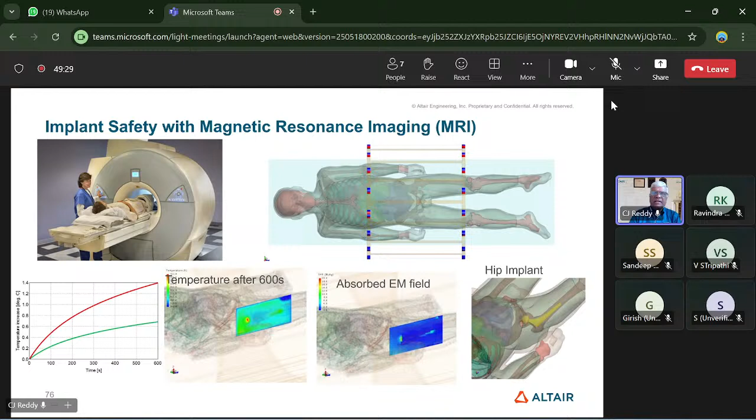joint replacements with metallic parts, when you go into the MRI machine, this could heat up and cause discomfort, but at the same time, at some point it can be too hot and even damage your tissues. So those simulations can be done combining thermal with electromagnetics, but also wireless pacemakers and those kinds of things can also be simulated.

That's a broad spectrum of various applications in different industries. I'm not covering all of them, just showing some samples for you to see how computational electromagnetics or simulations are playing a role in various products that we use or are connected with in life.